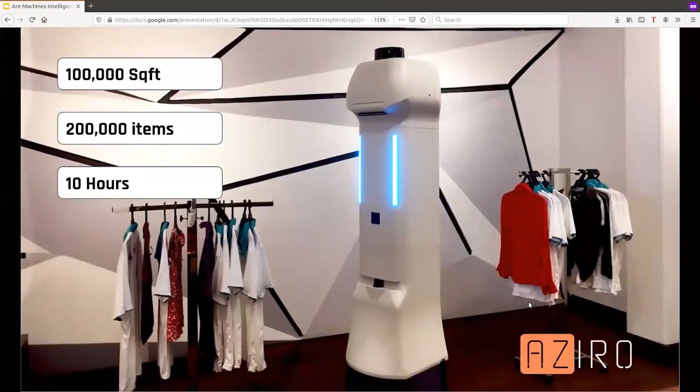I'm pretty sure that you have not heard about this. This is a robot called Aziro, made in Sri Lanka by Zone 24/7. I'm pretty sure you have not heard about it, but this is pure Sri Lankan work. I'll quickly explain what this does. I'll go forward, and while the video plays, I'll explain.

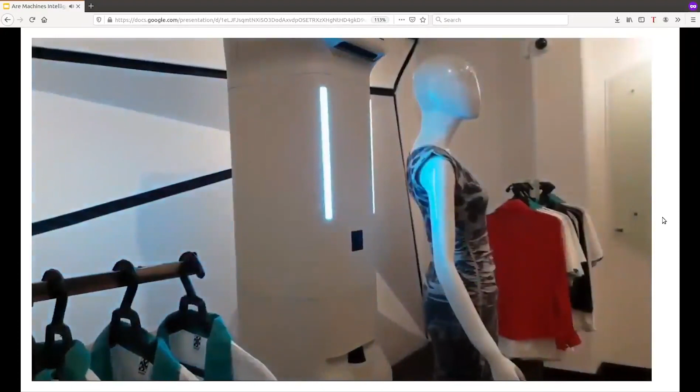So this is a robot you can use to take inventory of a retail store. In retail stores in other countries, say the USA, China, or elsewhere, they have very large retail stores, so taking inventory of items can be very hectic. Millions of items, right, so we can't count them manually. What this robot does is it navigates autonomously throughout the store, captures the inventory number and the location of each item. There is a lot of data, and it's very convenient if we can get this information autonomously. So we at Zone 24/7 have made this robot. I will explain more about it in the coming slides.

All these robots I showed in the previous slides are called mobile robots. What do you think a mobile robot is? A mobile robot is a robot which can move itself from one point to another, from point A to point B, navigating on its own. There are two major types of robots: the manipulator type, like robotic arms that pick and place items, which is an industrial robot, and the second type is mobile robots. We are specializing in mobile robots, so I'll be centered on mobile robots in today's session.

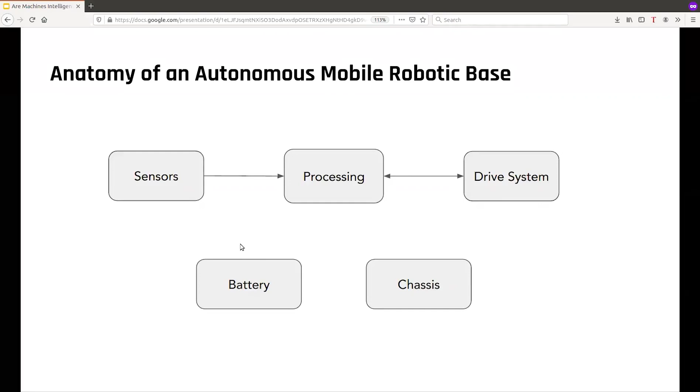Now, when it comes to sensors, those are some basic sensors. The people who do electrical engineering, software engineers, and we have mechanical engineers here, so I'm pretty sure you have heard about these sensors. Tactile sensors means touch sensors, switch sensors, and proximity sensors to know the distance between the robot or the equipment you use and the nearest obstacle.

And also there are two important sensors called Lidar and vision and depth sensors. Those are the most important sensors that we use in mobile robots in actual industrial applications. I will briefly explain about those as well. And we have inertial measurement units to see the direction, magnetometers, and some other sensors like orientation sensors, velocity sensors, and GPS.

All these things are used to get an input from the environment, to get an idea about the environment, because we cannot operate if we don't have an idea about the environment, right? If we take all the sensors out from some person, everything, touch sensors, eyes, ears, nose, everything, then it's very hard for that person to operate. So that kind of problem is there. We have to make sure that we give enough information about the environment to the robot for it to take its own decisions.

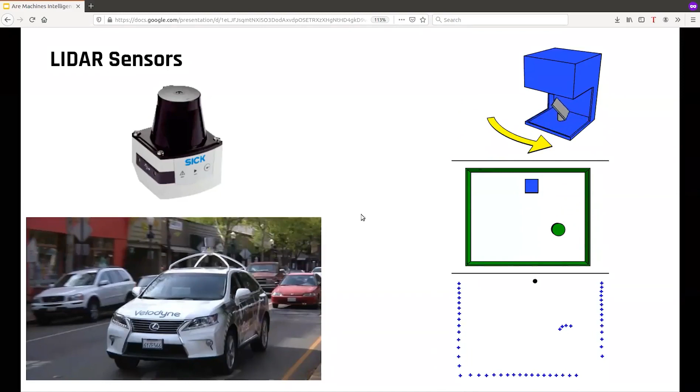This is the same thing, but we have 16 or 8 layers of these beams. Usually this is the car, the front view, those are the side views, and this is what our computer sees in the robot's computer. This is what it sees, right? So it has to take decisions on that. Using this image, you can see that there are obstacles around the robot. So this is one of the very advanced and frequently used sensors in mobile robotics and autonomous cars.

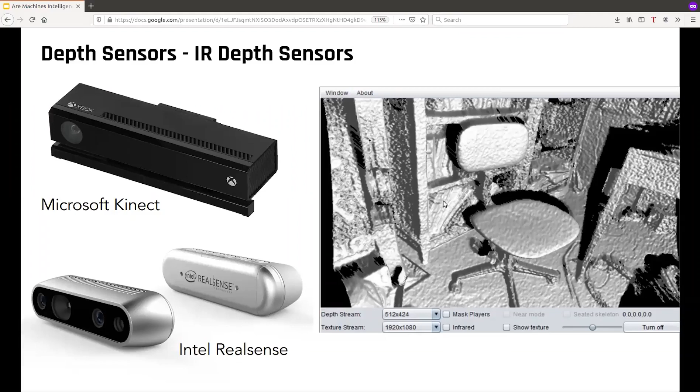And this is also another very important sensor called the IR sensor, a depth sensor. Instead of just giving the RGB image, it gives us distance to each pixel in the image, so we can get an idea. Why do we have two eyes? We have two eyes to perceive, to do depth perception, so we can get an idea of how far an obstacle is from my eyes. Similarly, these sensors give you that information to make it more comfortable for you to take decisions. So if you know there's a chair at this distance, you know when to turn your robot if you're moving towards that.

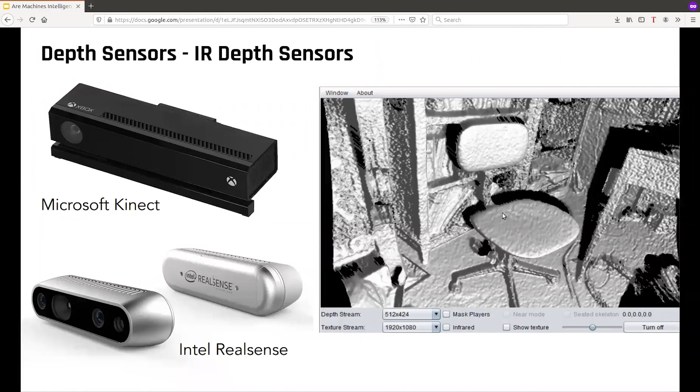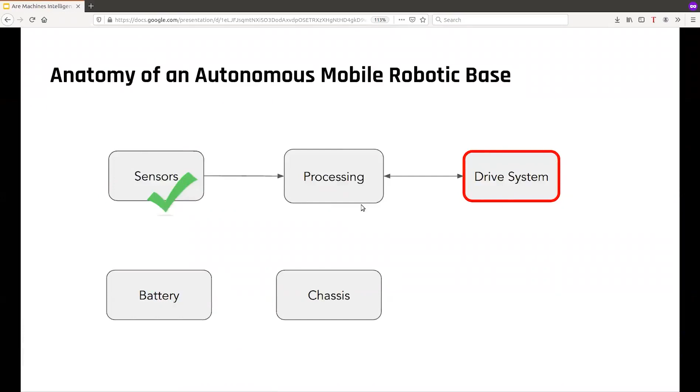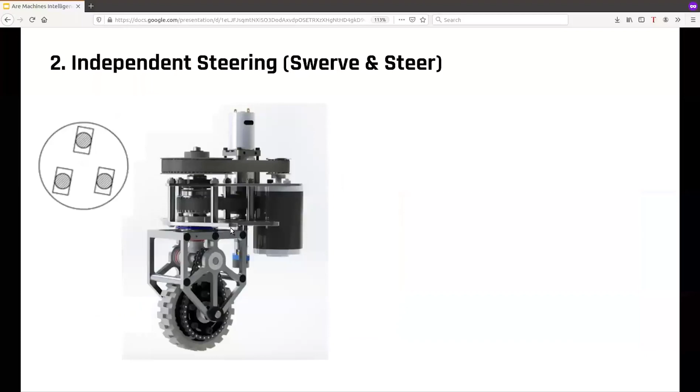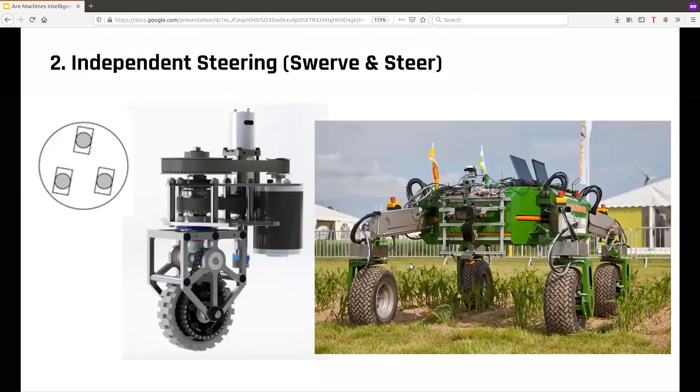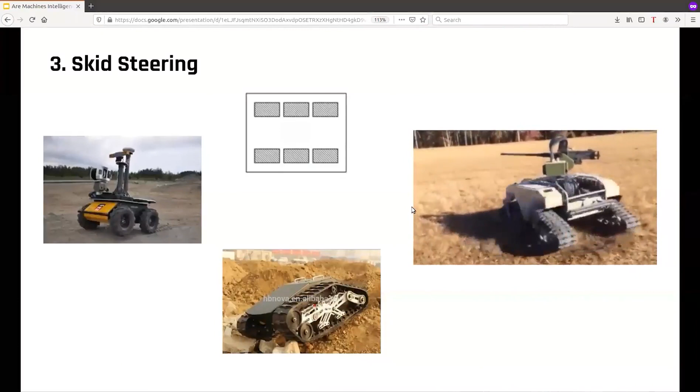So likewise, we have multiple types of drive systems. Not even this, we can have legs as well. If it is a humanoid robot, we'll have legs, right? And these wheels are called mecanum wheels, so it can move in multiple directions.

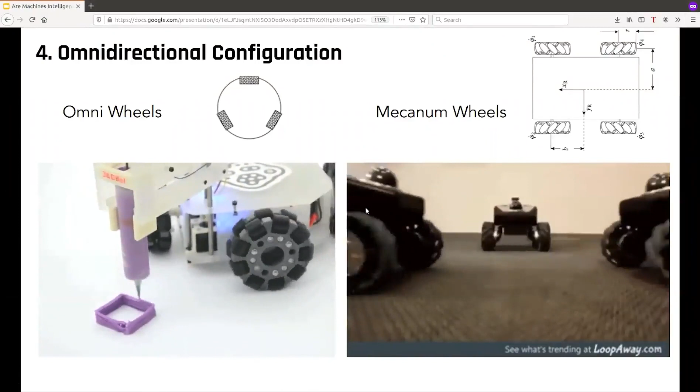Right. Going forward.

Okay, now here comes, I mean, we can take a start from today's topic at this point. So now we know that we have sensors to take inputs from the environment, and once we process that input, we can give an action item to the drive system, so it will perform an action on the environment, right? So how we take this decision, how we process this information.

So here, now this is a very basic mobile robot. This is something that we usually do for university robotics demonstrations from our company. So this is a depth camera, as I mentioned, looking downwards in front of the robot. And here we have, hope you all can see my mouse pointer, right?

Yes, we can see. Okay, great. So here, can anyone guess what kind of sensor this is? So this is a Lidar sensor. As I mentioned before, there are sensors called Lidar. So this is a Lidar sensor.

And we have motors as our actuators, and we have a control board, and as our brain to take the decision, here we have a computer. Here we have kept a laptop simply. So just like that, we can have a computer take this, this computer to take decisions. All right, now we have the computation power as well: sensors, actuators, and here we have the brain.

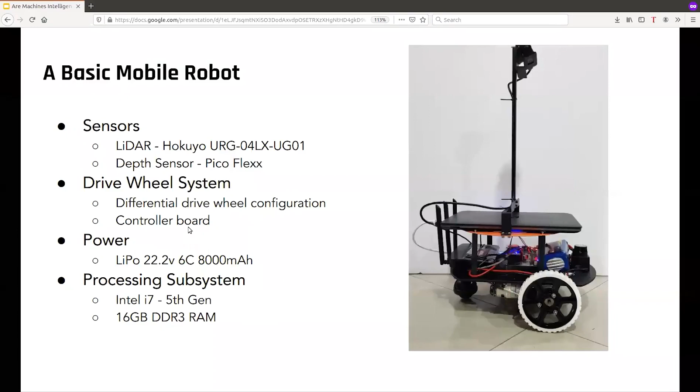So as a solution, what we can have is we will have to have a framework kind of thing, a middleware on top of our operating system. If we have this computer, we'll obviously have an operating system, right? Windows, or Ubuntu, anything, any operating system. But to communicate with sensors and our drive system, we will have to have another layer on top of this operating system. So people found the need of a middleware or a meta operating system to implement all these things, more like a framework.

So in time, this ROS, robot operating system, was introduced. This is not a traditional operating system like Ubuntu or Windows. This is a meta operating system which runs on top of an operating system. So basically we need a Linux distribution, most of the time we use Linux. We need Ubuntu or any Linux distribution to run this meta operating system.

Right? So if we talk about, I mean, at this point, take this note. If you are to get into industrial robotics, industrial mobile robots, this is a very good start for you. One of the first things that you should have a look at and study is ROS. There are plenty of tutorials available, so search on internet as robot operating system.

It will be a bit difficult. You will not see how this will be applied to robots at the beginning, but get used to it, get some simple things up and running. Then at the end, you will realize how important this thing is, right?

And how ROS started. So like many other technologies at Stanford, it started as a research project, I guess a PhD project, in 2007. What they did was they made this robot as their project, and they faced all these questions that we had, right? How to get all these questions. So what they did was they came up with a framework called ROS, and they were able to successfully utilize that framework, the meta operating system, to run this robot. This is called Prototype 1, PR1.

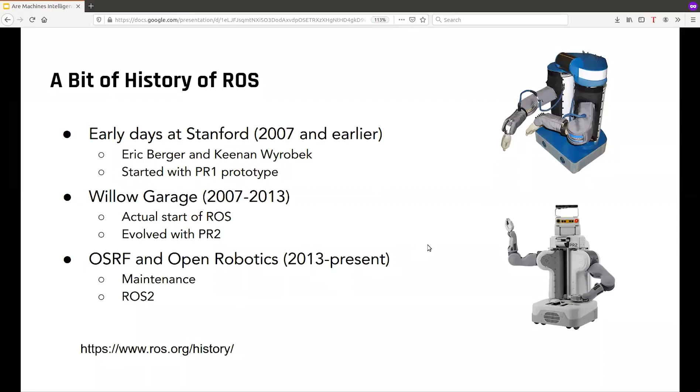All right, now let's see why ROS is so important and how it is going to help us. Now in ROS, I mentioned in the previous slides that we have to take inputs from the environment, and we have to process them and then give some action items to our robots, motor controllers and all. So there are plenty of components. What ROS does is make all these components individually running components. I mean, those components are independently running, loosely coupled, I would say.

Now, say this is my camera node, and this is my decision taking node, and this is my motor controlling node. So I'm not writing everything into a single code. I'm running 3 different instances, 3 independent nodes. Those are only connected using message passing. If you are a software engineer, if you have heard about MQTT and all, you probably know how PubSub works, right? Publish and subscribe. So this particular node takes input from the camera, and if there is any processing, it does the processing, and it sends information through a message passing mechanism. There is no code level relationship between A and B. It will only pass information through a message passing mechanism.

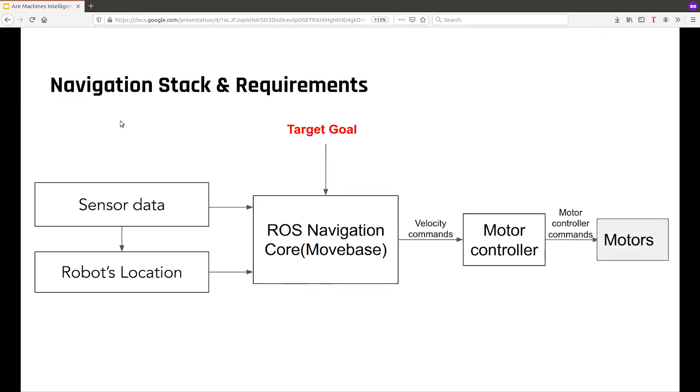And once we give a target goal, it will take this information, run through this entire process, and give us velocity commands: which way we should travel and at which speed. Velocity commands means how fast you should go, in which direction. So we can decode this information in our motor controller, drive our motor, and get the feedback back here. So that is how a simple navigation stack works.

And when it comes to localization,

I think we're running out of time also.

So there are basically a few types of localization. Local localization, this is for the mechanical and electrical guys specifically, is just taking the odometry of the wheel. If you have turned your wheel by one round, you know that you have traveled a circumference distance. So by calculating that, adding those rounds, you can identify where you are, right? But this can be very wrong due to drifting and those kinds of scenarios.

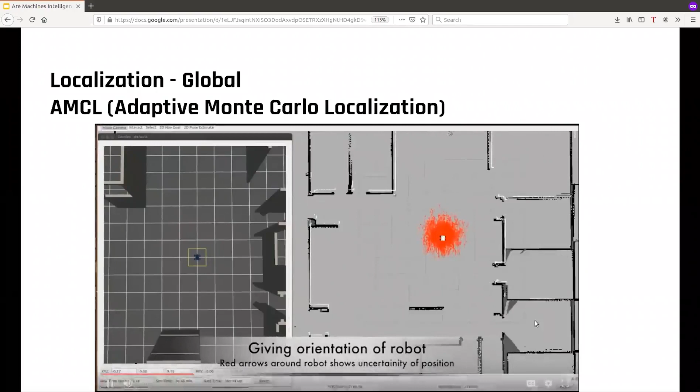So these are some algorithms. Just don't think much about it. So this is called global localization. So as you can see, the map is given. This is a known map. So all I have to do is I have to locate myself. I'm here. So I just have to locate myself in this given map. The right side one is a map. So once it starts moving, you'll see I just have to make sure that I know my position. So that is one localization method.

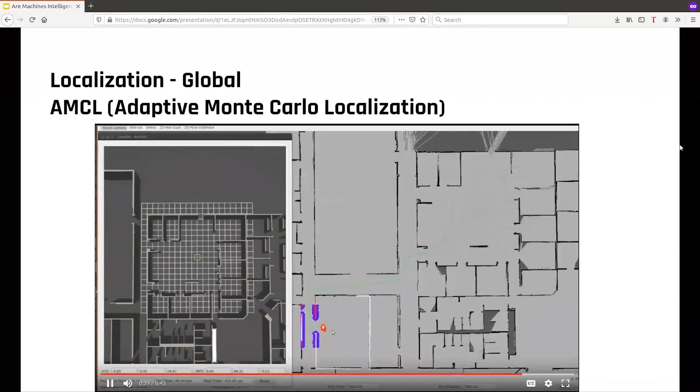The other one, most common one, is SLAM, because in autonomous vehicles we don't have the global information about the entire city, right? Because it can change time to time. So what it does is it tries to map and localize at the same time. So it will go forward and it will make the map and localize itself. So this is some sort of a chicken egg problem. People ask, what is done first, mapping or localization? So this is done simultaneously. That is why it is called SLAM.

So this is a very good area for you to do an individual study, because this is very interesting. This is how we map ourselves in some unknown city, right? Have a look at those things. I'm just giving you high level points so you can go and search and get an understanding about this. We can't teach everything in a subject in like 1.5 hours, right? So I'm just giving a brief introduction, a very abstract overlook. The terms, SLAM, those kind of things you have to note down and just go and search. There's plenty of information and YouTube videos that you can watch on these topics.

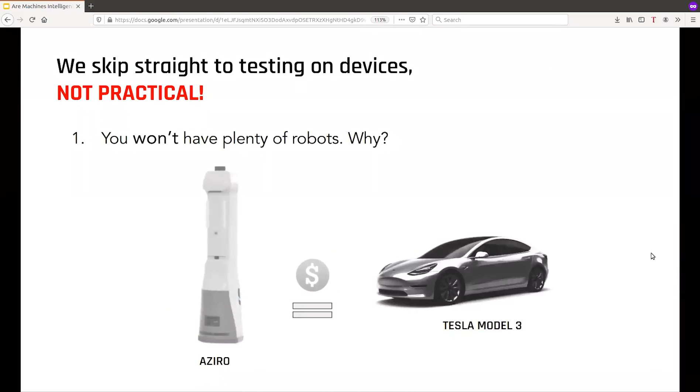So, one, we don't have plenty of robots. We don't have any amount of robots that we need, right? One reason is a prototype of this robot will cost as much as a Tesla Model 3, a large amount of money for a prototype, right? So you will not have many robots. And number two,

when testing a robot, if we navigate the robot from point A to point B, to do the same test again, you have to get the robot from point B to point A again. So it's not like restarting a server or restarting a mobile phone. You will have to take the robot back to point A and run the test again. So this is going to take a very long time.

Algorithms by nature are very buggy, right? There could be a lot of bugs. And if this buggy algorithm goes wrong and hits some surface, some obstacle like that, the robot will get damaged. As I mentioned, the price of the robot, now you probably understand why we can't straight away test these algorithms on a physical robot, right?

So as a solution, we have to have simulation. Simulation is the key, because for students also, obviously we don't have money to build an actual robot. A single Lidar will cost about $3,000, $4,000, right? The least costly one will also cost at least $200. So that is not an amount that is affordable by a student. But fortunately, this problem is universal. Even for people in other countries, it's a good bit of money.

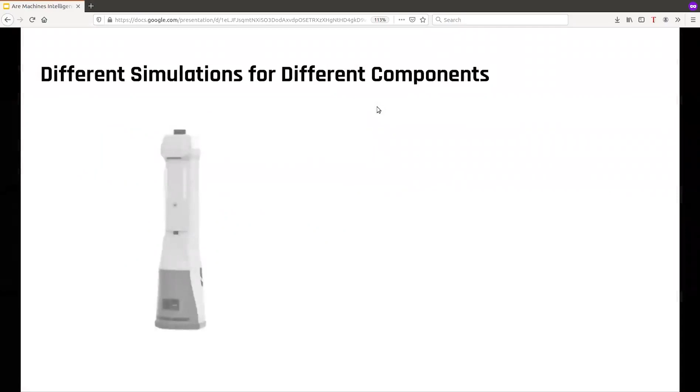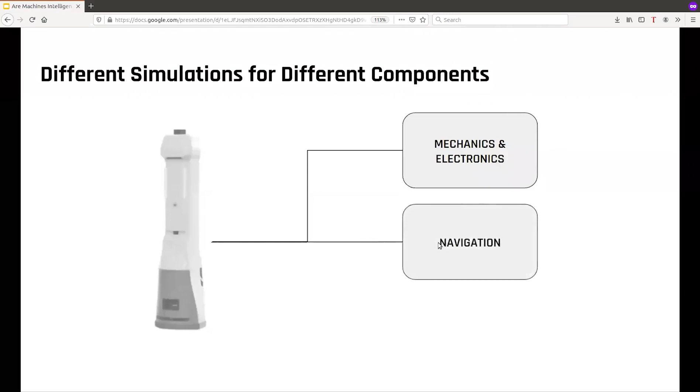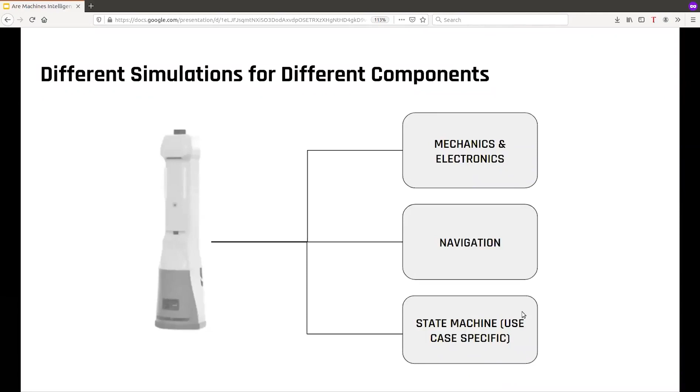So basically, when you are simulating, my suggestion is, first divide this simulation into different parts. Don't try to include every simulation into one single component. So one thing is you have to simulate mechanics and electronics, and then navigation algorithms, and the rest of the items, I mean, the use case software, state machines and how the robot is monitored. All these things you can simulate in different ways, right? So these are the things that you have to try out.

For mechanical, there are a few mechanical engineers, right? So by now you probably know the capability of SolidWorks. You can test all the forces, bending moments, weight calculations, coupling angles, everything can be calculated using the software. So you don't need an actual robot to do that. We usually don't go the trial and error method in robotics. What we do is we plan well, and only once we have a perfect robot do we develop it.

When we take part in robotics competitions and all, we do the trial and error method. But in industry, we don't have that luxury. We have to make sure that this is the final outcome, and then work towards that. So what we can do is plan everything, design everything in SolidWorks and do all the simulations, coupling angles, weight simulations, everything can be done there.

And also for electronic students, we have Altium, I think PSpice also, OrCAD, all these now have simulation capability. So you can do all the electronic component simulation there. And also, I think SolidWorks now probably has thermal simulations as well, I'm not sure about it. So hardware-wise, everything can be simulated using these softwares. Some of these softwares have free student licenses for universities. Check on that as well.

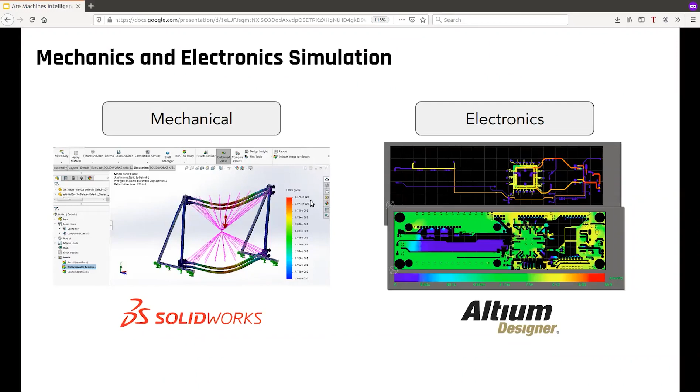And also for navigation, you don't need a robot at all. There are two types of simulators that we usually use. One is a software called Gazebo, which runs on top of ROS. Here you can create any type of environment and model it very easily, like a house or an office environment, and also make a fully functional robot, including lidar sensors, depth cameras, RGB cameras, everything. You can implement a fully functional robot and integrate it with ROS using Gazebo. So you don't need a robot at all to simulate your navigation task.

Even we first go to the software and do simulation, then only we go to the robot. At this point, you can write your entire software stack using this simulation. If this is a bit resource consuming, you will need a better laptop for it. But there are some low cost, low resource consuming versions as well, called Stage, which is a 2D simulation platform, so you can use that too.

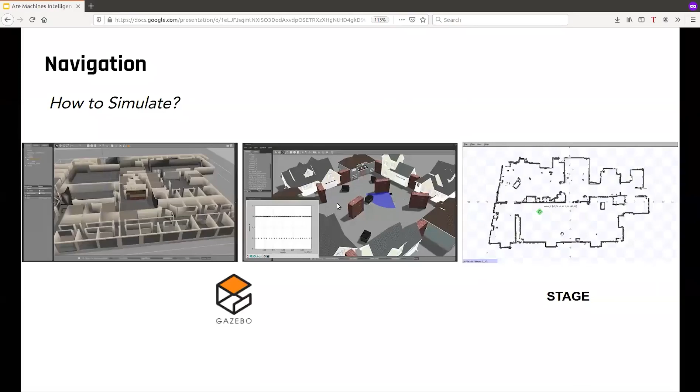All right, I know it's just a bit fast, but I don't want to crop any of it because I just wanted to give you the high level idea. You'll at least grab the terms that we discussed today, so then you'll be able to know what kind of scope we have in this area of industrial robotics. I think it's time for questions.